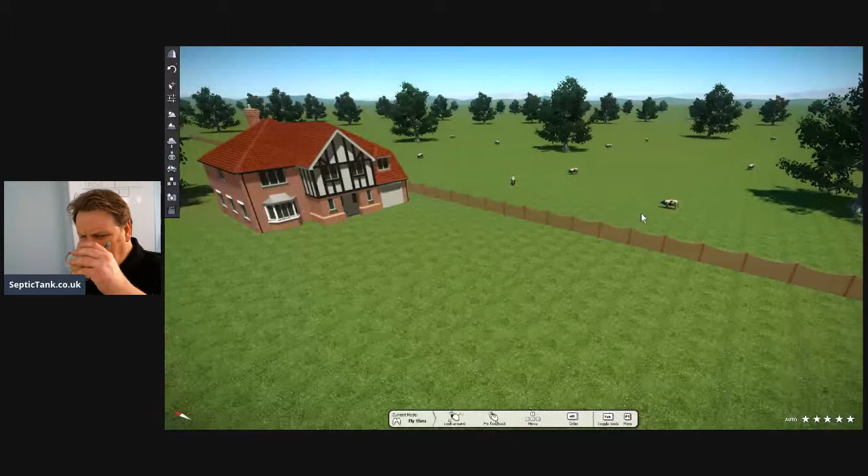So here's a typical house, I've got a lovely garden there, and you've got the cows and the trees, kind of an idyllic house in the countryside. So let's say this house here needs a new septic tank, and the septic tank's going in the front garden. So let's give you a quick précis of the sequence of events.

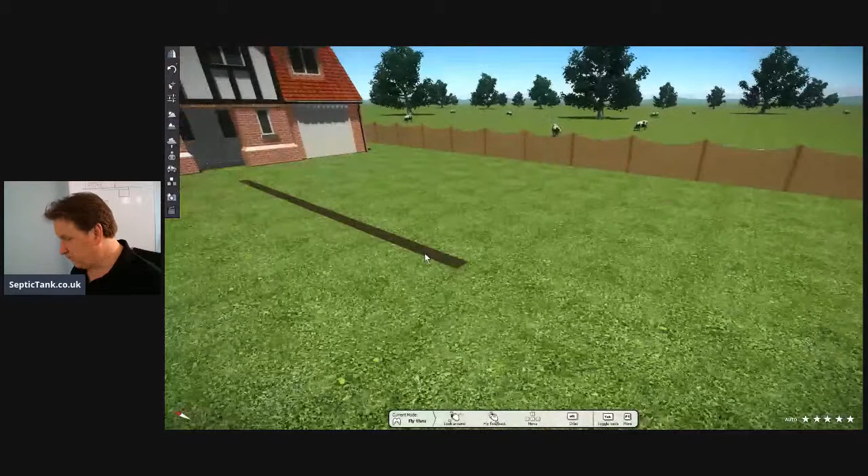Okay, so let's start. Let's hope all this technology works tonight. So the first thing you need to do is a trench. So there we go, there's a trench. Now, if you're wondering what the hell's he doing, the trench here is for the pipe.

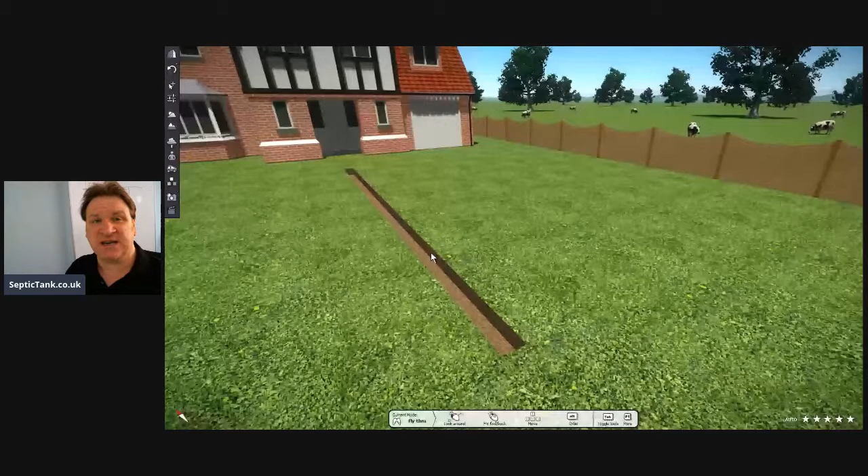Now, imagine in the house here, all the wastewater is in the house - whether it's your bath, your bidet, your shower, your sink, your kitchen, whatever, all the wastewater is in the property and it needs to go somewhere. If you live in the city, obviously it goes into the sewer, but if you're in the countryside and not connected to the main drainage, there is no sewer. So you need a septic tank and soakaway. The first thing you need is a trench to put a pipe in to divert all the water from your property into a hole, let me show you next.

So let's give you this. So there we go, straight away we've got a trench and we've got a hole. All right, there you go, so it's pretty simple so far, yeah. Okay, pretty simple so far.

Now this particular septic tank system I'm going to show you is very, very popular right now. I'm just going to finish my tea before it goes cold.

If you're wondering why there's a tea bag in my tea, it's because I like builder's tea, as they call it. So you've got your trench here, you've got your hole. What we do now in the trench, we put the pipe in. So there we go, now you're starting to get the picture. Let's have a closer look. All the wastewater from the house is going to come down this standard 4-inch orange pipe, and as you can see at the moment, it's going straight into a pit.

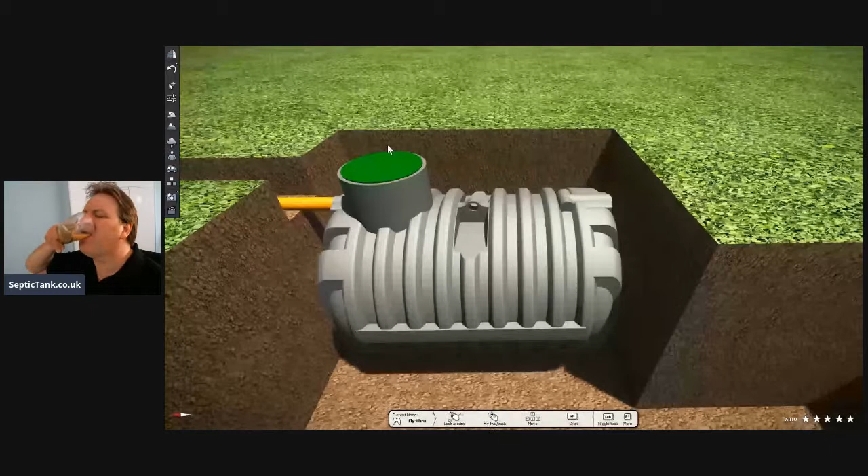All right, so that's the tank gone. So what do you do after you've connected your pipe to your septic tank? Well, let me show you this.

Okay, so we dig another hole. All right, so we dug another hole here. Can you see that? So this is the outlet pipe on the septic tank. So all the sewage, all the wastewater is going to go in via this tank. The tank is going to fill up with liquid and with water. All right, and here is the outlet pipe.

Okay, so let's put a pipe in the outlet pipe. There you go. Okay, so now it really is starting to make sense, isn't it? So you've got an orange pipe in, the tank fills with water, and you've got an orange pipe out. Now the orange pipe goes to a soakaway.

Now there's many different soakaways out there. Some of the best soakaways that I prefer for many reasons, not only because they're approved by building regs, but also because they're very easy to install. The beauty with a bullet-shaped septic tank is that the outlet pipe is very near the grass here. Can you see? So you can start the soakaway literally just a foot or so from the grass.

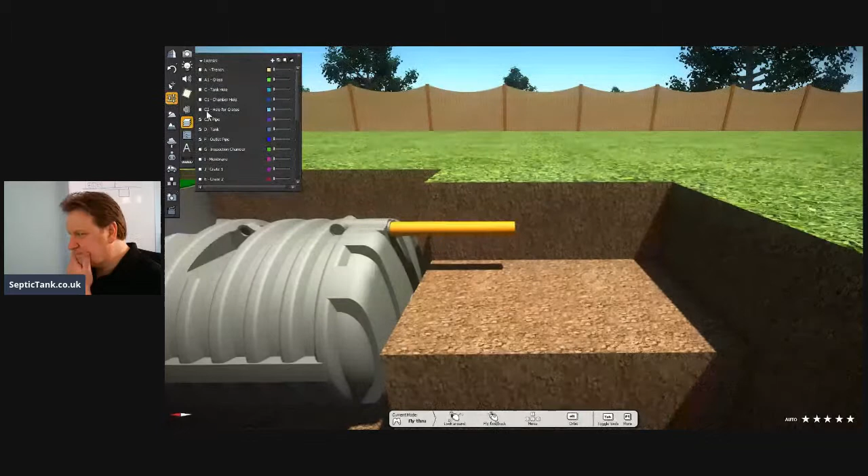Okay, now let me show you this. So what do we put on the end of the outlet pipe? All right, well let me show you this. You put an inspection chamber. Now, why do you put an inspection chamber on the outlet pipe?

Well, I'm going to create another hole now and show you. So let's dig another hole now for the soakaway. All right, hold on 2 seconds, let me dig. There we go. Gotcha. All right, so there we go.

So if I was to just give you a quick overview now, we've got the pipe coming from the house. It's coming from the house there, so there's the house there. All the wastewater travels down there into the septic tank, and then it's going into this inspection chamber, which I'll show you what that's about in a minute. But this is the hole for the soakaway.

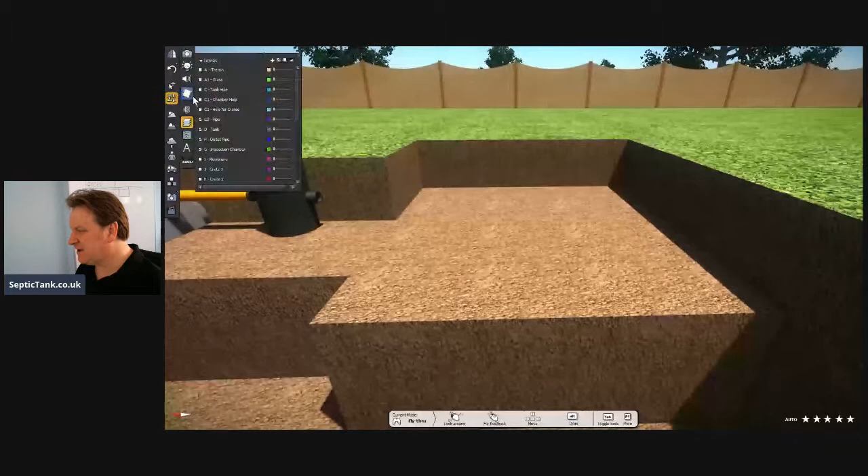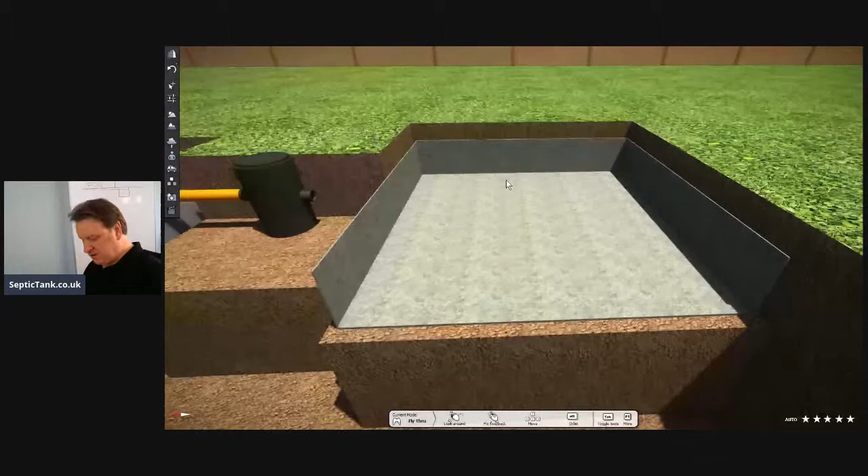And what's going in here is the amazing septic tank soakaway crates. The soakaway crates basically are a fantastic invention, whoever invented these. So what you do, you line the hole with membrane - I'll show you why in a second - and then in the membrane, you then just put the crates in. Put 1 in, 2 in, 3, 4, 5, 6. Now the number of crates can differ.

It depends on the size of how many bedrooms you've got. Okay, so it depends on the number of bedrooms. But if you go to septictank.co.uk, I've created the soakaway kits, the septic tank soakaway crate kits, matched to the number of bedrooms, so you don't have to worry about that. Okay, so there you go, so you've got your membrane.

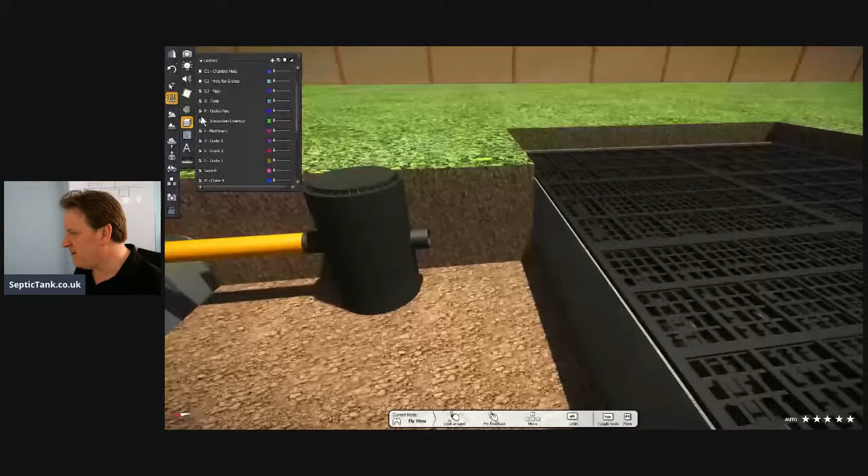I'll show you what the membrane does in a minute, but once you put your crates in, you connect the outlet pipe. So we've got a pipe from the tank into the chamber and into the crates. Can you see it there in the crates?

You can cut a hole with a knife or a hacksaw in the crates, and then literally you just put in the pipe. That's probably gone in about 1 or 2 feet into the crates. So that is what the septic tank and soakaway look like.

Now, septic tank soakaway crates are not rainwater crates. Let me state that. You cannot use rainwater crates for a septic tank soakaway. You're not allowed to. On many sites you'll see that rainwater crates are illegal, or not to be used for septic tanks, and they're not. These are special septic tank soakaway crates.

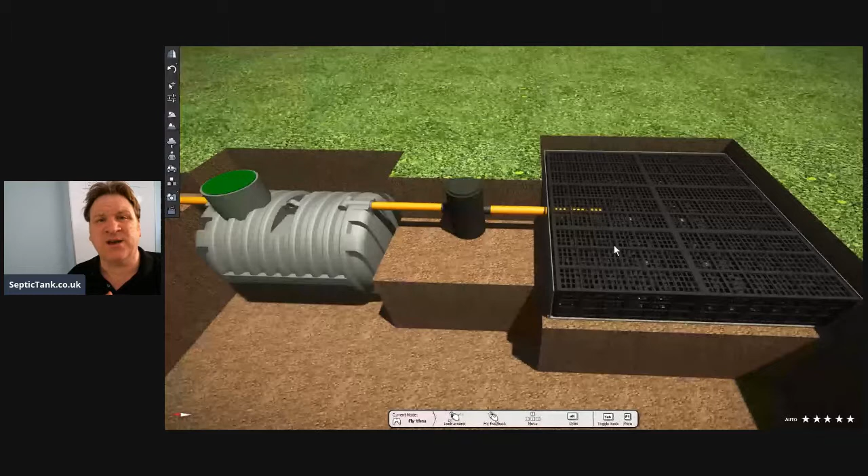Many builders do buy the rainwater crates and use them for septic tank soakaways, and what happens is the membrane and everything just sludges up and it balloons, and they have to dig it all out again and then go and put septic tank soakaway crates in.

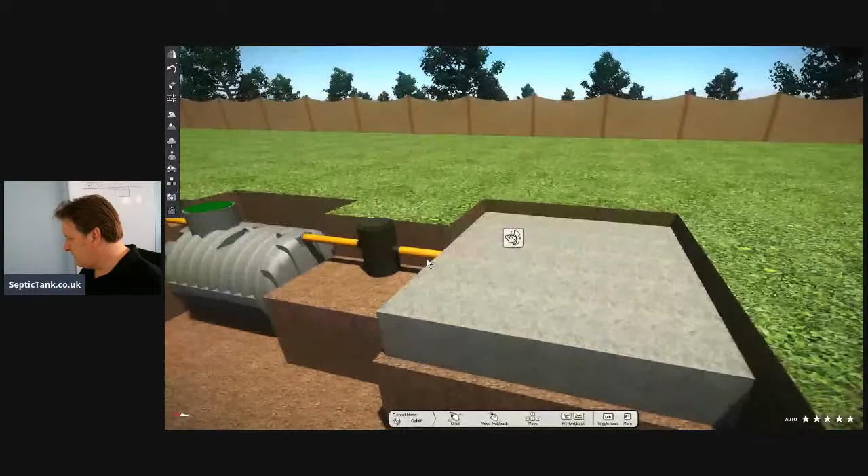So once you put your crates in, you basically just cover everything over with membrane, just like that. The reason you cover it with membrane is because it stops the soil getting into the crates. If you look, you've got it on the sides and on the top, so no soil can get in there.

Now, you don't have to put membrane at the bottom of the crates if you don't want to. You can if you want, but personally I don't—I like the water to go into the crates and then drain away here. All the liquid comes out of here into there, and it goes into there, and the membrane acts as a time release agent, so the water is time released into the soil.

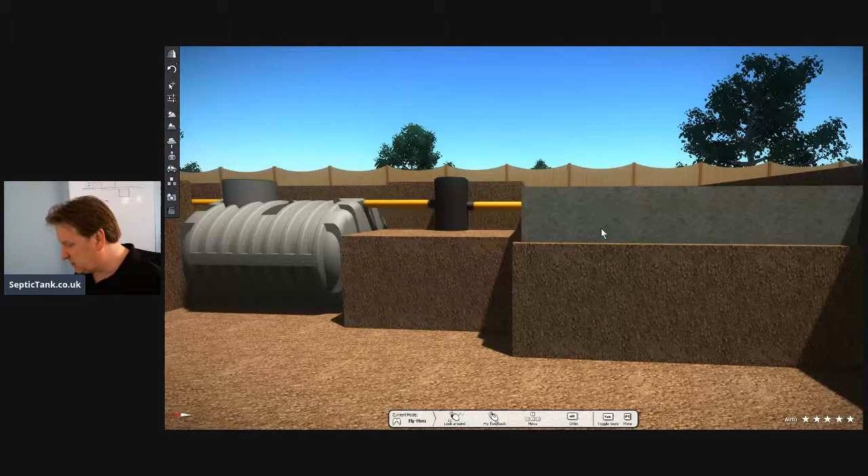So that is the septic tank soakaway system. That's one of the most popular systems on the market today.

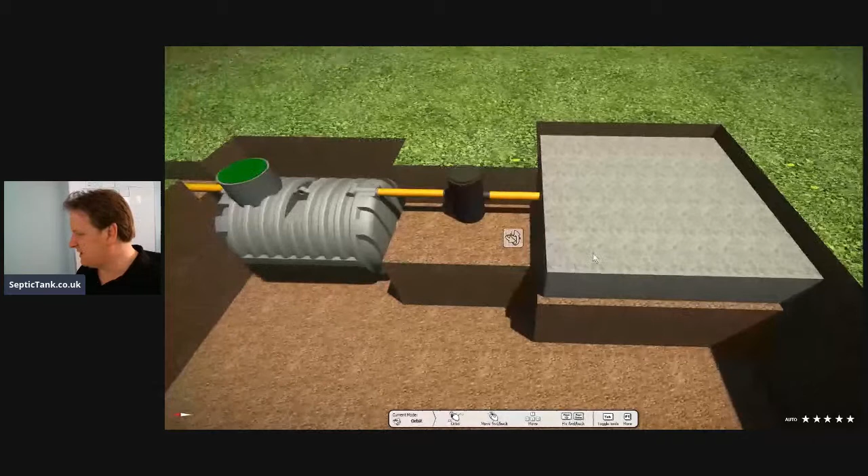So what is this? Why have I got this here? Well, 3 of the main products that cause problems with septic tank soakaways are sanitary towels, baby wipes and nappies. You'd be surprised—although you may be responsible, and I'm not saying people are irresponsible, people just don't think. They flush baby wipes down the loo or sanitary towels, thinking it's a natural way to dispose of something. Sometimes even nappies—they're just not thinking.

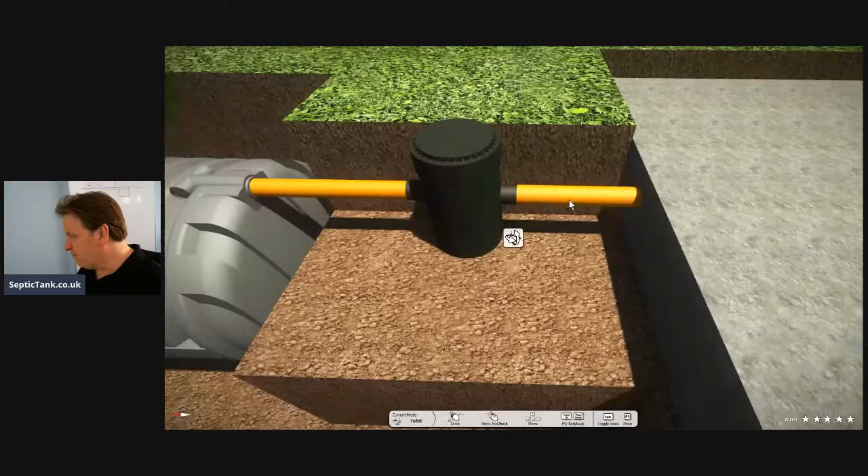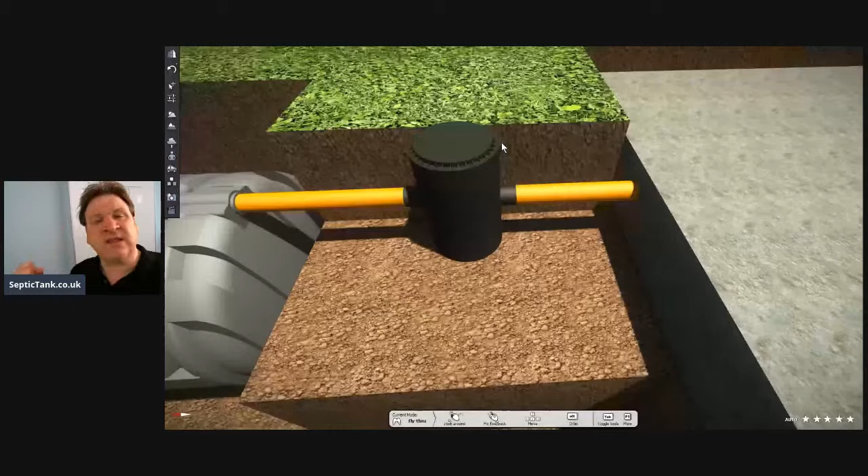But what happens is, if you've got this inspection chamber here, there's like a filter, a brush filter, that sits in between from here to here. I supply a free brush filter with it, and the brush filter basically traps any debris, and the debris is stored in here. So once every 6 months or once every year, you can just lift the lid, take the debris out, and basically it protects the soakaway.

Because imagine this: if your septic tank soakaway becomes blocked up, what are you going to do? The septic tank emptying firm will come and suck everything out of the tank, but they won't be able to suck out the blockage in the soakaway. So someone has to come, like Dyno-Rod, dig up your soakaway, unblock it and put it back. It's going to cost you £1,000 or more.

So for the sake of a manhole chamber and a filter—I supply a free brush filter with it—it will save you hundreds and hundreds and hundreds of pounds. So there you go, that's your septic tank soakaway.

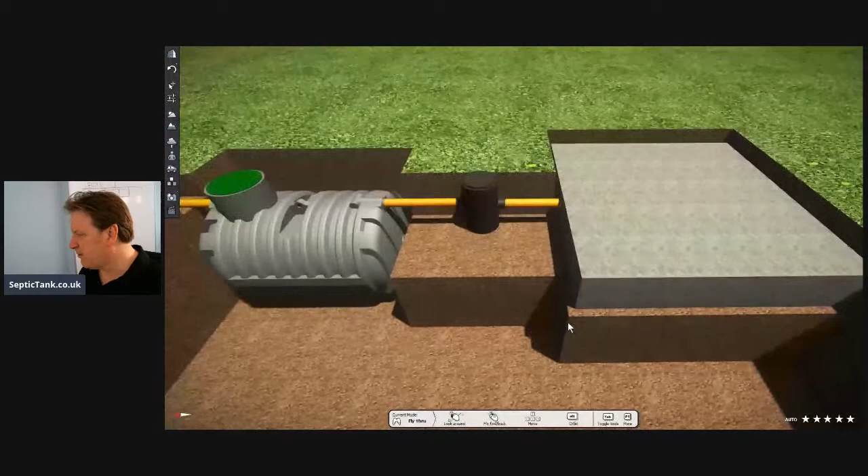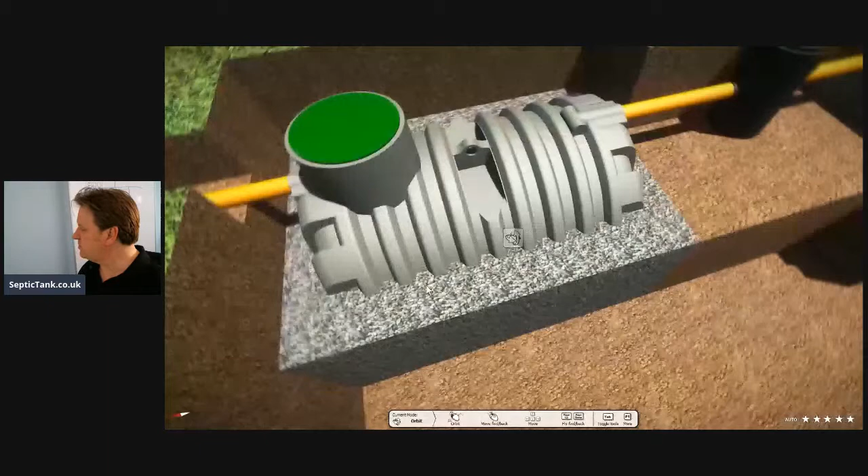So once you've got it in the ground like that, all you need to do now is put shingle around the tank. Remember me telling you they're low profile tanks? The beauty with these tanks is that they don't need concreting in. You can just literally backfill with some shingle, just like that. And the reason for that is if the ground's boggy, or you've got any water pressure, the shingle around the tank will absorb the water pressure and stop it popping out the ground.

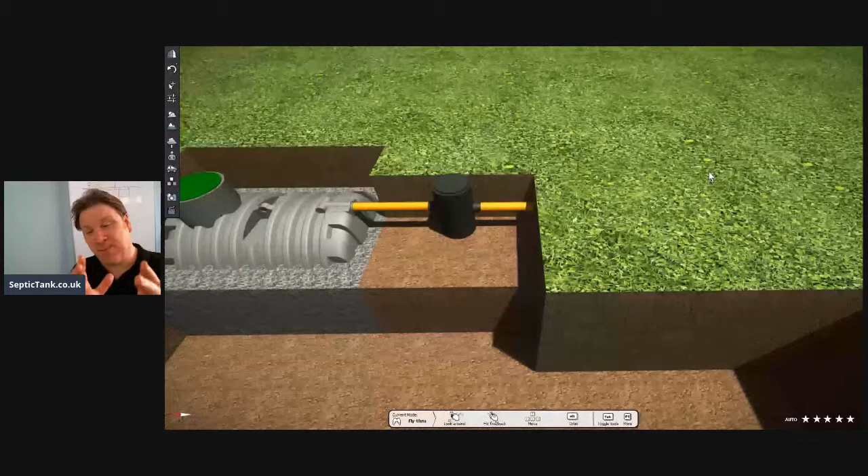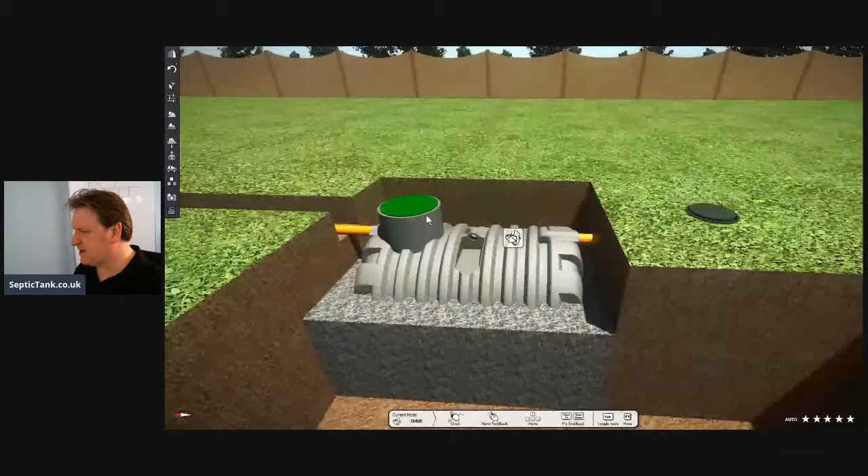Then all you need to do is this. Let me show you. There you go, so then you just cover the crates over, the septic tank crates, with soil. They've got a 60-ton bearing load, so if this is a drive, don't worry about it—the crates just go under the drive, no problem. You can drive a tank over them, it won't crush them. Then what I do is put soil around the inspection chamber. There's a pipe going in, so you've still got access with your lid there. And then all I do is just cover the tank over with soil. There we go, bang, job done. Look at that, how neat is that?

So then all you've got left is your trench, and you just literally put the soil over that. There you go. And then once you've seeded it, or turfed it—that's the word I was looking for, it's been a long day today—once you've turfed it, job done. There you go, and that is a brand new septic tank and soakaway system. And that will take you, if you've got a mini digger and you've never done it before, half a day to do maximum. They're just so easy now.

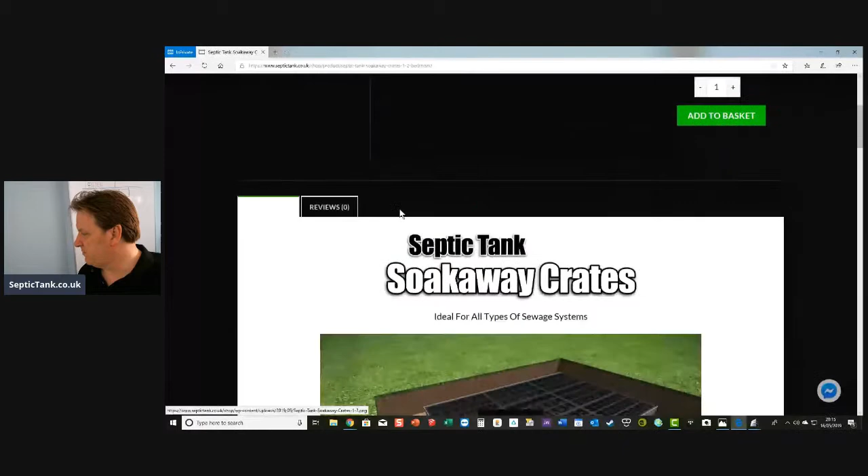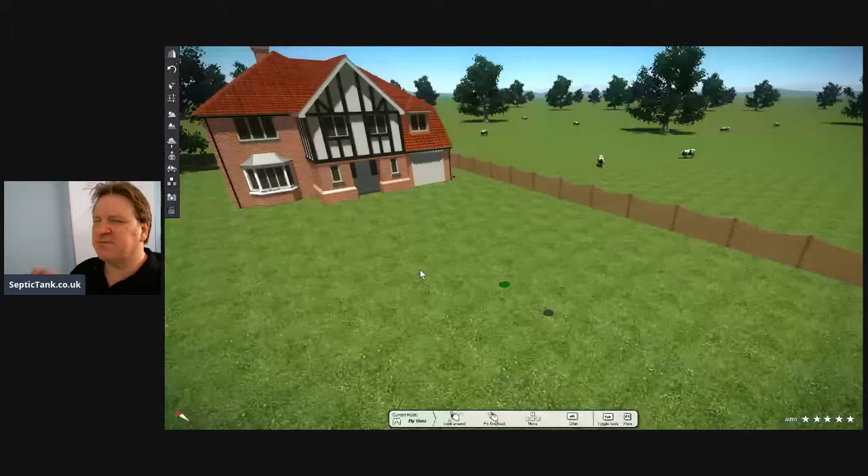Now I just want to show you one more. I want to show you something fantastic now, something amazing. The next one is called Easy Drain. So we've already seen about the crates. Oops, where did we go there? Okay, where did we go wrong? I'm still here, if you're wondering what I'm doing—everything's just gone a bit skewiff on me. All right, so I'm still here. Oh, there we go, we're getting back now.

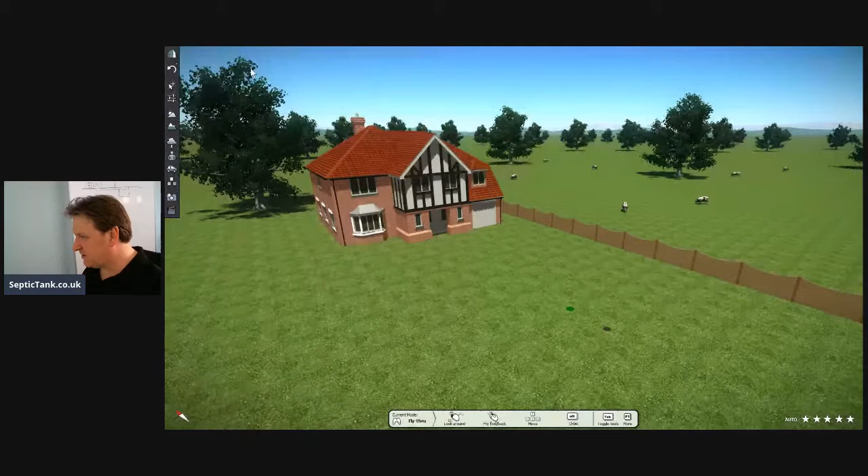All right, let me show you. So that's the soakaway crates. Okay, so now we take that down and now we go to Easy Drain. Let me show you this. So we've got the same kind of type of house, but maybe they don't want septic tank soakaway crates. You don't have to have septic tank soakaway crates—it's a serving suggestion, all right? Now all of these products are legal, but some people have different preferences, so let me give you another serving suggestion.

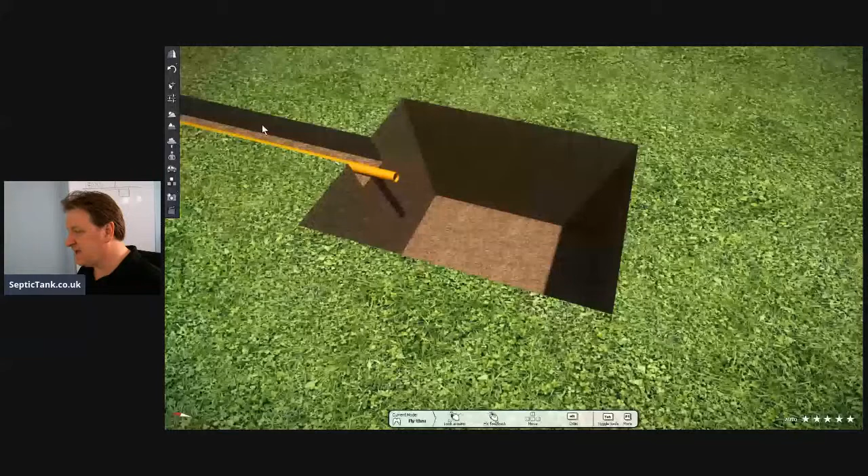Okay, so you dig your trench, you dig your hole. All right, so here we go, let's show you where we're at. So we've gone back to here, we've dug a trench and we've dug a hole. And so in the trench, I'm going to put the pipe. Ta-da, so there we go, remember that? So we got the pipe. All the wastewater comes down from the house into the hole, and here is the hole. There's the hole there. And so now in the hole, we put our tank. You've seen me do that before, haven't you? So that's nice and simple, isn't it? So we've got all the wastewater coming from the house down into the tank.

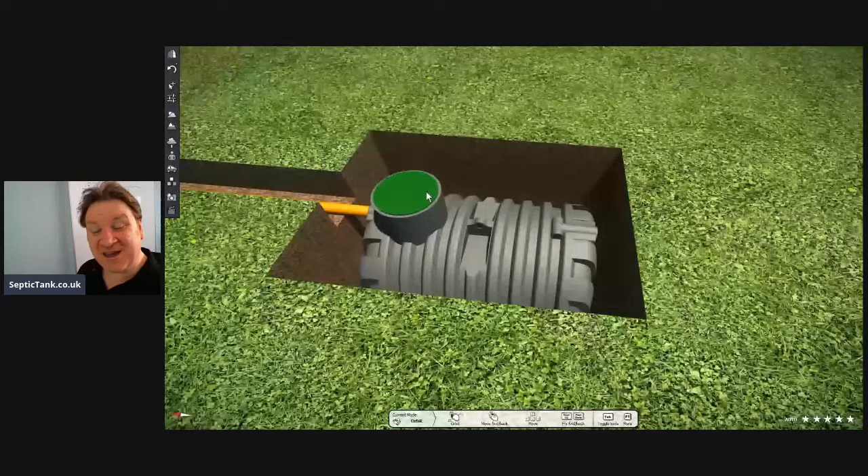Now, this is where the septic tanks differ. Have a look at this. All right. So then what's this? On this one, it's almost like a chicken's foot, isn't it? It's 3 fingers. I call this 3 fingers. So this is where the product called Easy Drain is going.

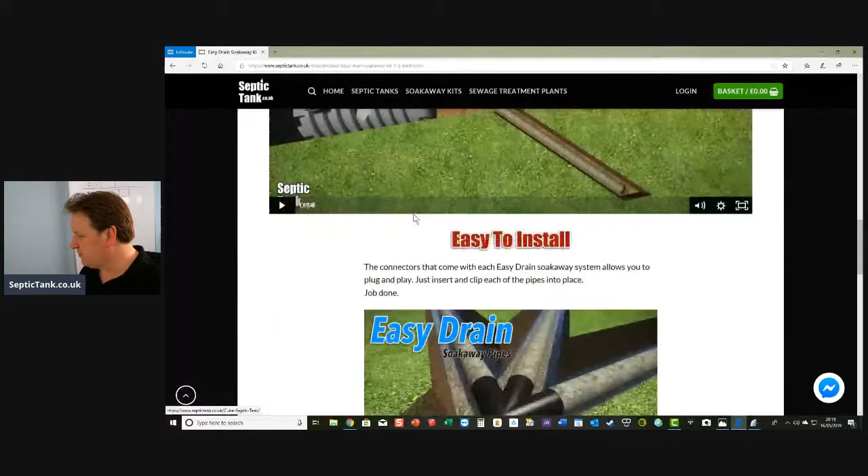So let me just show you this, right? So the Easy Drain here, they're basically pipes, and they've got a space age kind of membrane over them. I'm going to show you what they're like in a minute. They just clip together, and again, you can just add them to the basket. But I thought I'd just show you what they look like there. So let's just go back to here.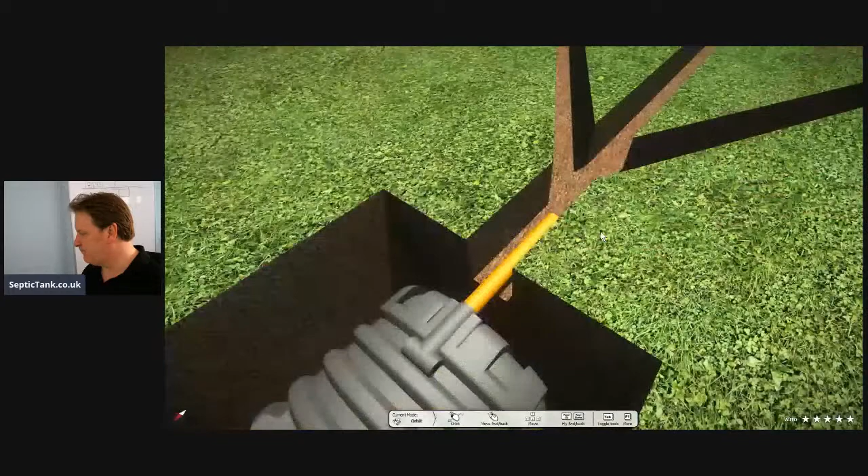Easy Drain. Okay, so let me show you how to install this Easy Drain. You've got your outlet pipe there. So then we put our outlet pipe in. There we go. So remember that. Let's just give you an overall view. You've got your pipe in there, you've got your tank there, and then you've got your outlet pipe. And now what we do is, then we put our inspection chamber there.

And just once again, remember me telling you how shallow the soakaway is there. Look at that, man. Let me just get a cutaway section here. Let's see if I can get into the hole a bit more, although you can see it from there. There we go. So can you see how shallow that soakaway pipe is? On the onion-shaped septic tanks, the soakaway is going to start all the way down here. It's crazy on the onion tanks.

Look, I'm not demonizing onion tanks, but people think if they buy an onion tank, because they're like 150 quid cheaper up front, they're going to save money. It's a misnomer. It's a red herring. The onions are about 150 quid, 200 quid cheaper than a bullet-shaped septic tank on the front end. But you've got to dig a hole that's 3 times deeper than this, and you've got to concrete the onion tanks in. They cost another 1,200-1,300 quid to put in by the time you've factored in the concrete.

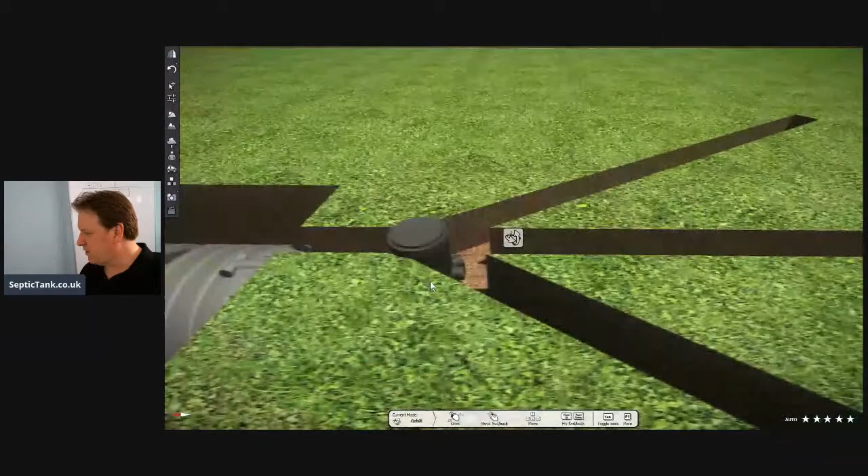If you don't concrete the onion tanks in, the manufacturers won't warranty them. And you've got to get a bigger digger, which is going to cost you 200-300 quid more. Plus, it'll take you a day or 2 days to put the onion in the hole. To dig down 11, 12, 13 feet is no fun. Believe you me, I've done enough onion tanks to know that. But some of these low profile tanks are just 3.5 foot deep. So you've put that in, and then here's your inspection chamber.

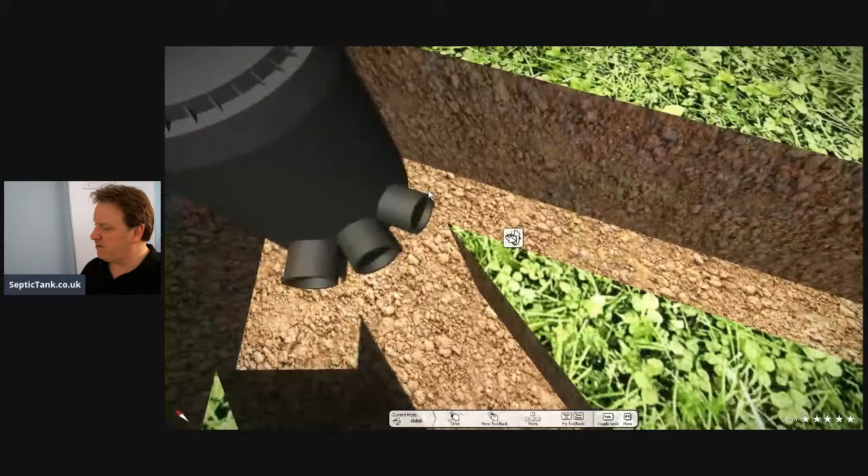Now again, I put a special filter brush in that with a sock on, and that goes into there. You'll notice on the inspection chamber here, you've got 3 outlet pipes, and that's good because each of the fingers from the Easy Drain slot into there. They just push in. They're a loose fit, not a tight fit, and they go in about half a foot. So let me put the Easy Drain on for you. Let's put the 3 fingers on.

So literally like 3 fingers on your hand, there's 3 fingers on the Easy Drain. And that's what they look like. They just literally slot straight into there. And they've got male and female connectors on, so they just slot together. Giving you a bird's eye view again, let me put the grass back on. So just extending up, they literally just go in. It'll take you 5 minutes to put those 3 fingers on.

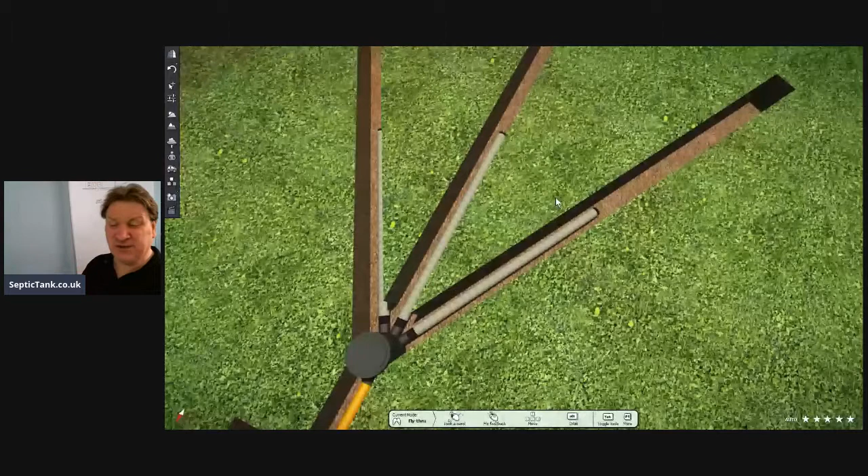Now each of those lengths is about 3 meters, so they're about 9 foot long each. So there's almost 30 foot of soakaway pipe, but it's spread over 3 fingers. So then from there, you just put the next set of fingers on.

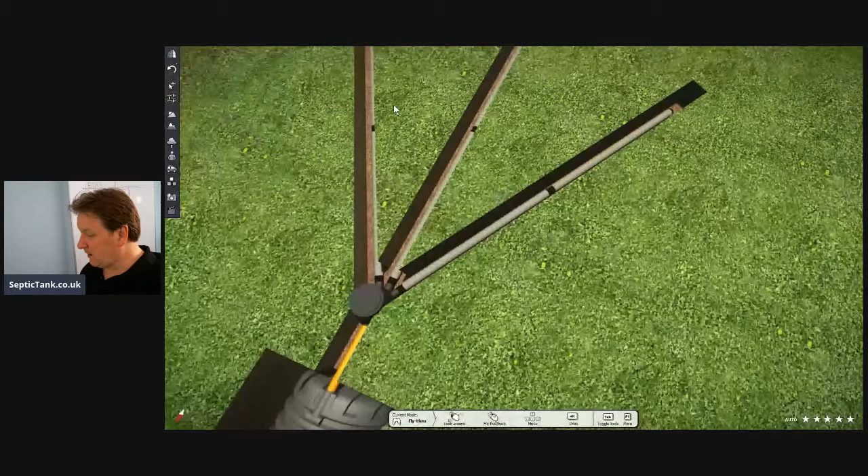Now, on some inspection chambers, you can have 5 outlets instead of 3, which means you can have 5 fingers, so instead of having to go really, really long, you can go wide and not so long, okay? So there you go. So that is what the Easy Drain looks like. Look at that. How amazing is that?

So let's just give you a bird's eye view of what the soakaway looks like from there. Okay, so that's what it looks like. So it's neat, it's tidy, and the whole thing will take you a couple of hours to put in, if that. And it's just absolutely amazing. And as I said, the beauty with the Easy Drain is that you don't have to use gravel with it. There's no law saying you've got to use gravel with soakaway pipes.

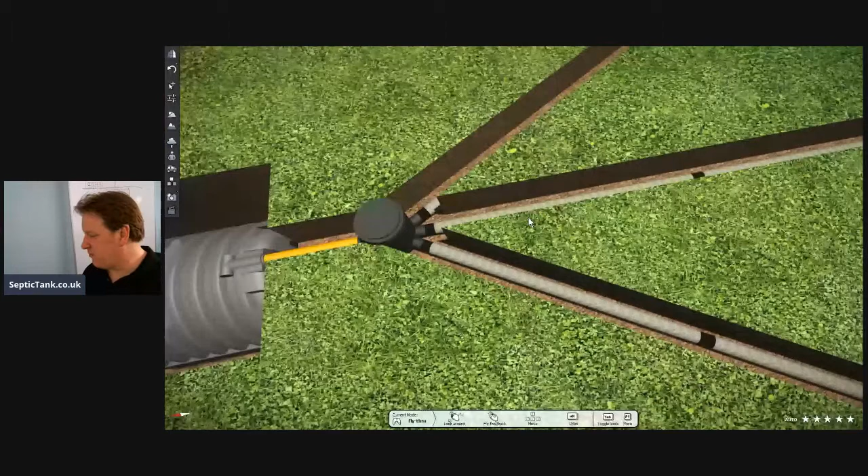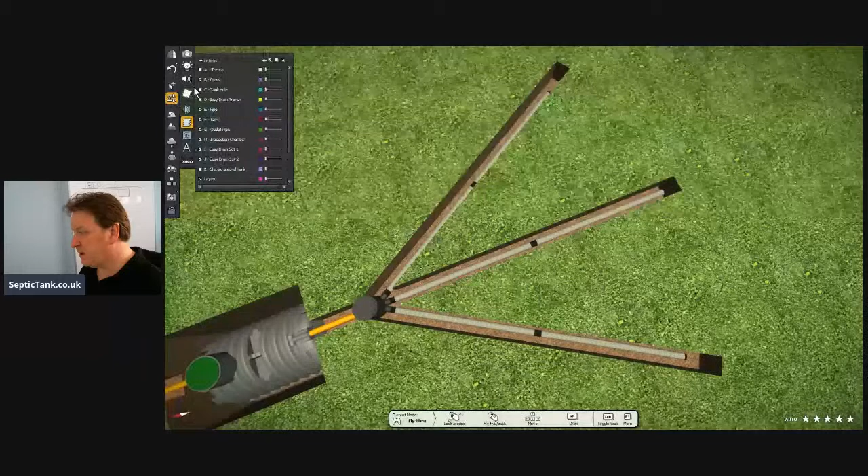In the membrane, right? So each of these pipes there, 3-meter pipes, you've got perforated pipe, and as I said, there's a special space age membrane around it, which is slow release into the soil. And because it's in the topsoil, 99.9% of the times you don't even need to do percolation tests, because it's just the best soil to install a soakaway in. So once you've put that in, literally all you do then is cover it over with soil. It's as simple as that, right?

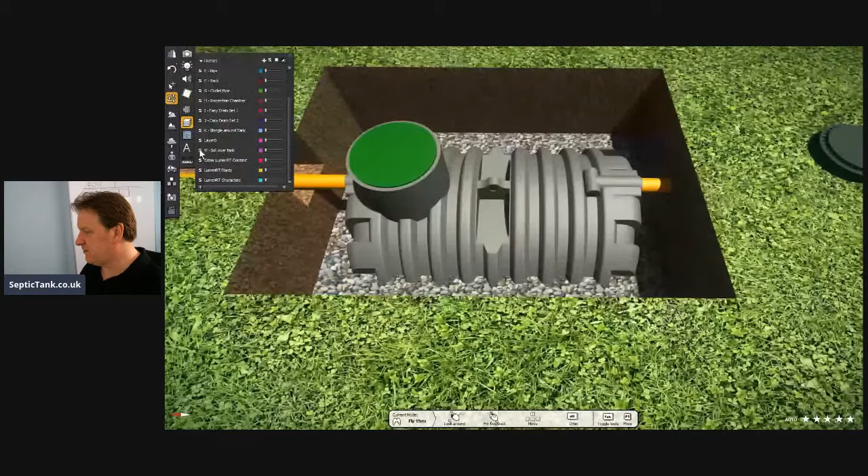And so once you've done that, and then there's the tank there, just backfill around the tank with shingle. There we go. There's shingle around the tank there. Look at that. I love these bullet-shaped septic tanks. They are the best, man. It's just absolutely amazing, okay? And then once you've done that, just put the soil over the tank. Oh, let's try that again. Yeah, all right. There we go.

And then all you've got left now is your trench, which goes to the house. Remember, that's the pipe from the house that's been exposed there. And then we just put the trench in, and there, look at that. That is absolutely amazing. All right. I love septic tanks. I love bullet-shaped tanks.

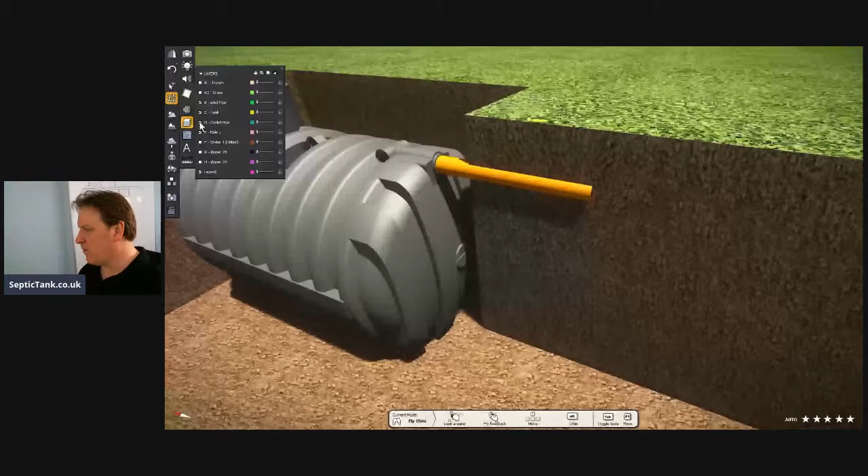So you've got your outlet pipe there. So let's put the outlet pipe on it. Okay, so here's the outlet pipe. There you go. All right, so let me show you how to do a percolation test.

All right, all this stuff for free, man. It's amazing. Okay, so let's do this.

So you've put your bullet tank in. So this principle I'm about to show you works for any septic tank. Okay, it works for any septic tank, so don't worry about it.

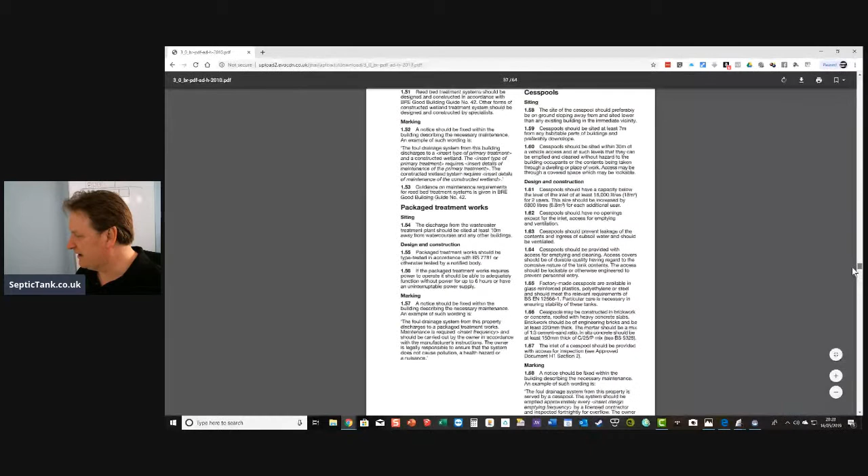And if you're wondering, basically I'm getting the information that I'm going to share with you now from UK Building Regs. Fantastic bit of information and guidelines on how to install septic tanks and soakaways, stuff like that. But we're looking at this bit. Okay, so this is the bit I'm going to be covering with you. The percolation test method. Look at that.

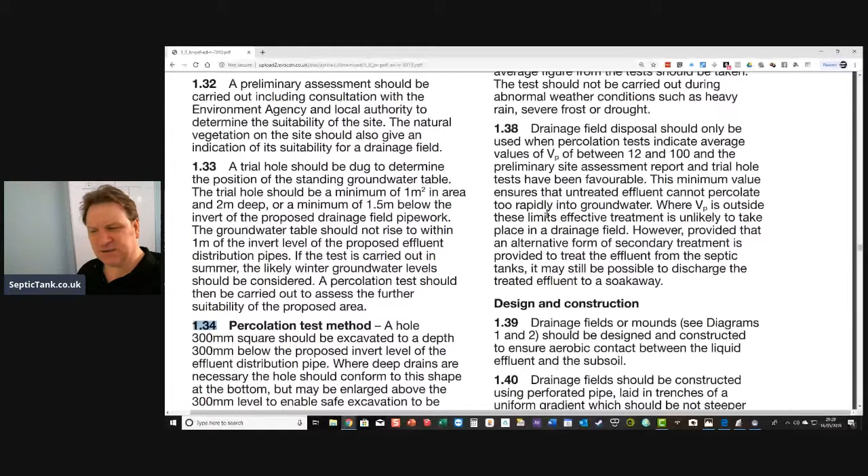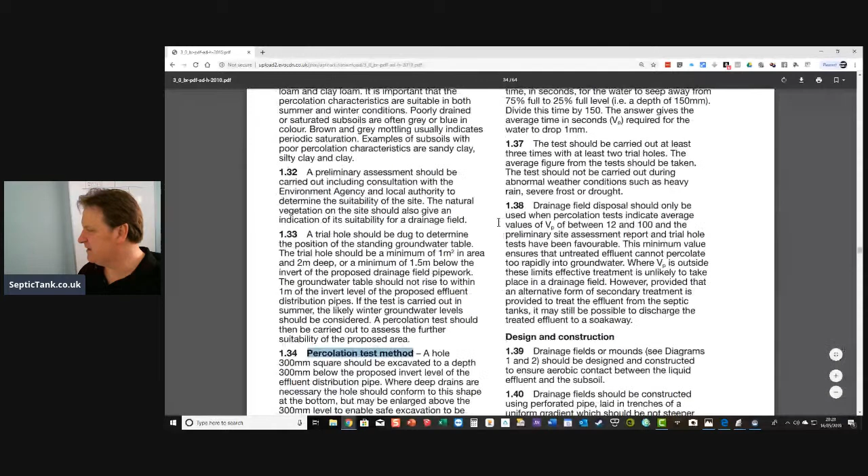All right. So we're starting on 1.34 there, right? And it goes all the way 1.35, 1.36, 1.37, 1.38. So let me interpret this information now on the percolation test method. So hopefully by the time you've done this, you'll be a bit more conversant with how to check if your ground's suitable for a soakaway. Okay, so there's the outlet pipe right there.

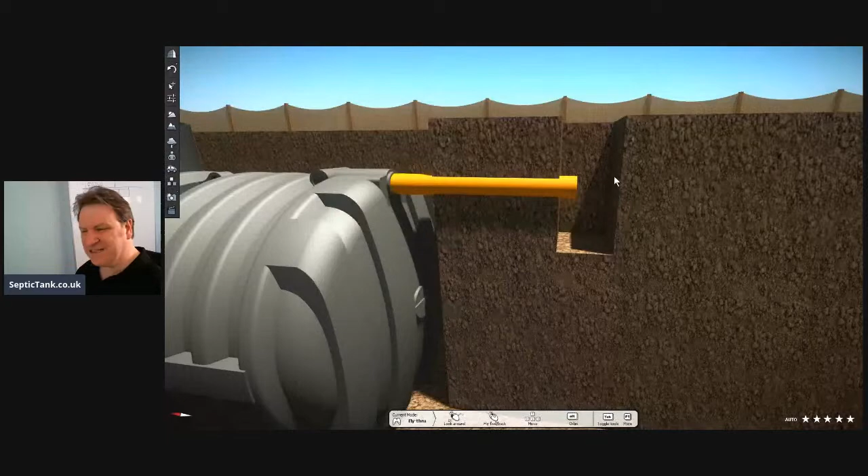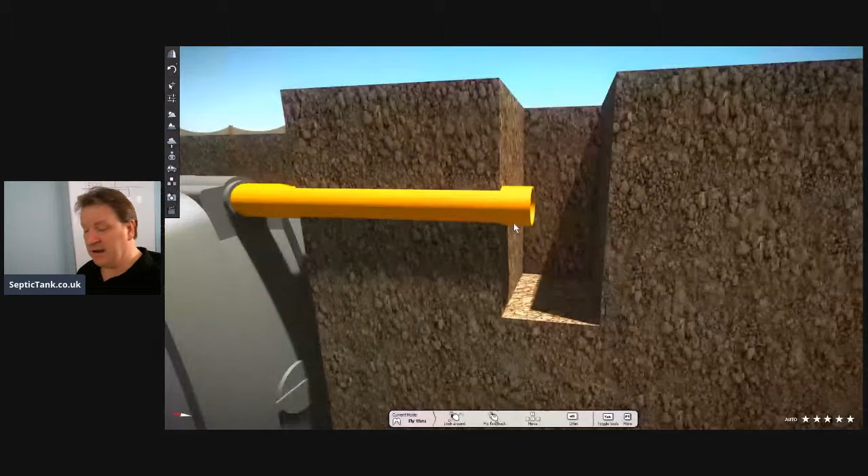Now, the first thing you've got to do is to dig a hole. So let me dig the hole. There we go. So dig yourself a hole. Now, the hole that you need to dig is 300 mil by 300 mil by 300 mil, 300 mil squared, okay? And then you go 300 mil below the level of the outlet pipe, okay? 300 mil below here.

Now, once you've dug that hole, you then fill it with 300 mil of water. There you go. That's pretty straightforward, isn't it? You fill the hole with 300 mil of water. Still pretty straightforward. Then you just leave it. Leave it overnight. And when you come back in the morning, the water will have drained completely away. That's fine.

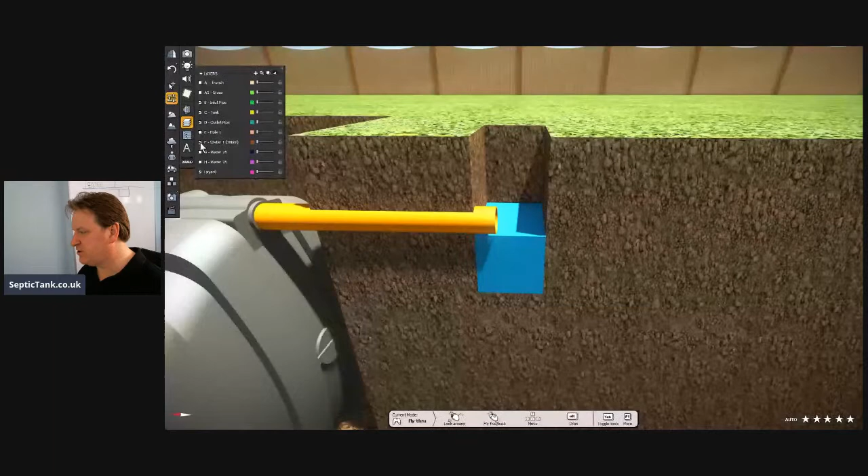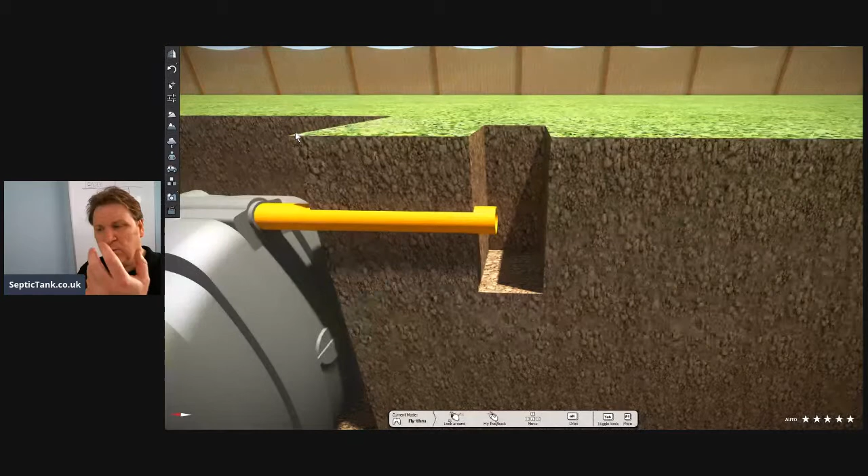Then you need to fill the hole back up with 300 mil of water again. So before you fill it up again, let me just tell you what you need in preparation. You put the water in the hole, the night's gone by, you've come back, there's no more water in the hole. Get a stopwatch on your phone or on your watch, whatever, and get ready. So you've got your bucket, 300 mil of water, your stopwatch ready.

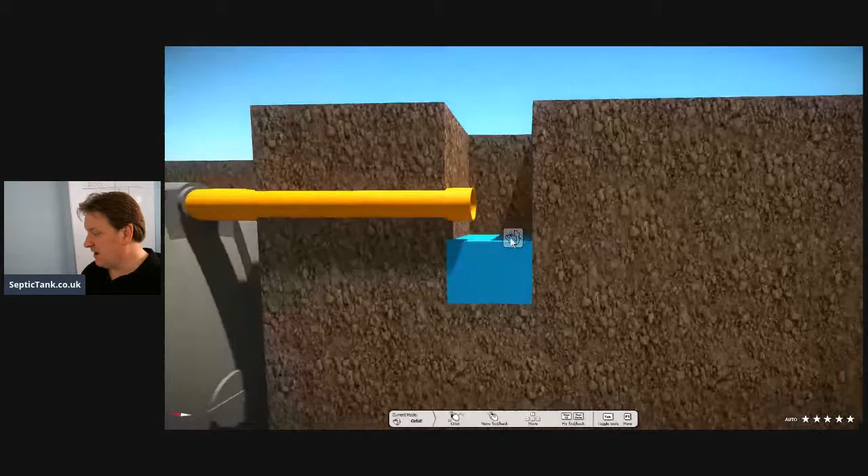So what you do, put your 300 mil of water into the hole. Then as soon as that water has fallen 25%, and 75% of the water is left in there, start timing. Press your phone, your watch, whatever, start timing. And the bit that you time is how long it takes to drop from,

So you start timing as soon as it's dropped to 75% of its original height. And then you time how long it takes to drop to 75 mil. It's as simple as that.

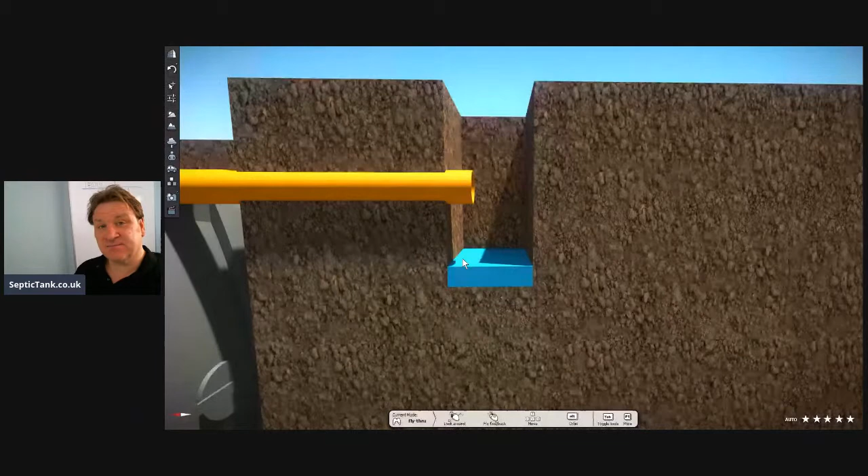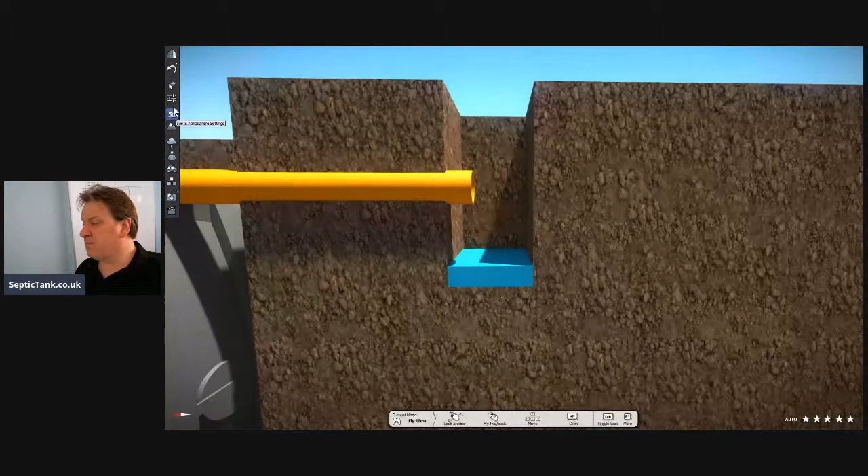So 150 mil. I'm messing this up a bit because I'm tired, but look, you've got 300 mil of water. There's 300 mil. So imagine it's split up into quarters. Each of those quarters is 75 mil. So once it's dropped 75 mil, you start timing. Then you time it until it drops 150 mil more. All right.

So there's only 75 mil left in the bottom, and then you record the time that it took to drop 150 mil. Does that make sense now? Sorry if that was a bit nonsensical before, but it's late and I'm tired. Okay, so that's it, I'll tell you about that again in a minute. Right, and then once you've done that, just record the time.

Building reg says you've got to do that 3 times. Don't do it if it's raining outside, or if the ground's really waterlogged. But if it's rained hard during the night, or it's raining during the day, don't do the test. You have to do it once the ground's been dry, in normal dry conditions, for a day or two. And then what you need to do is dig another hole.

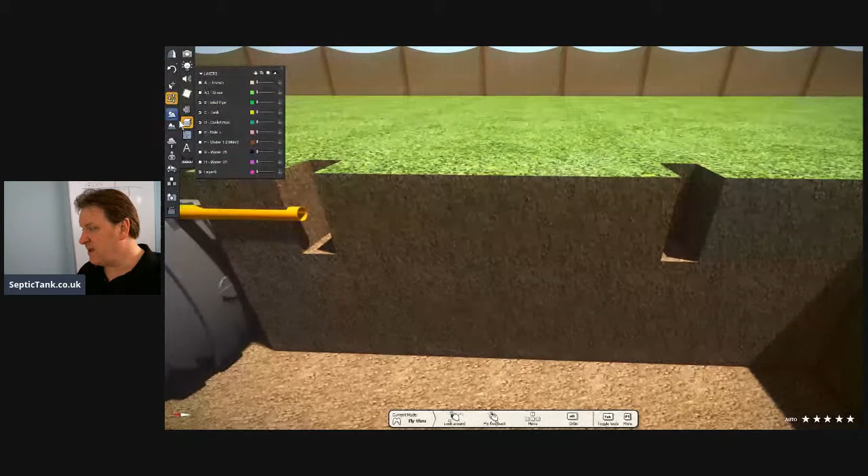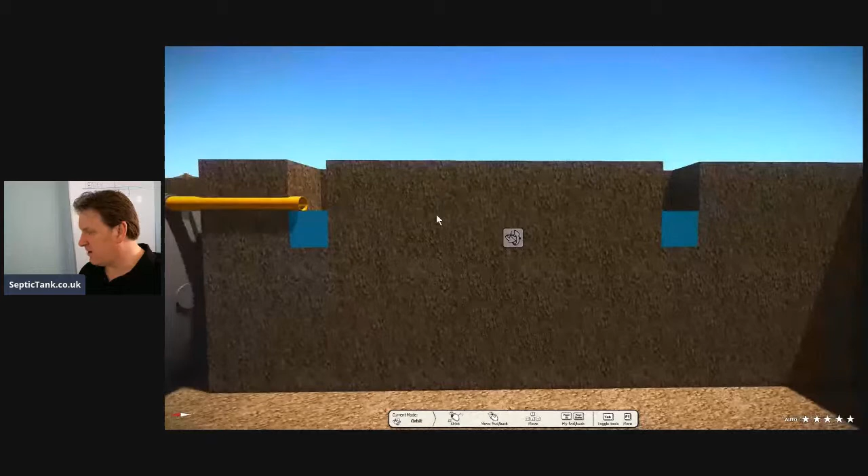So you've got to do 2 test holes along the path of where the soakaway is going to be. So I'll run through it again, hopefully it'll make a bit more sense this time. Do 2 holes, you've already put the water in the night before, then you just fill both of those holes with 300 ml of water. That's pretty straightforward up to now, isn't it? You fill both holes with 300 ml of water.

Then you don't start timing yet. You let the water level drop 25%, or 75 ml, then you start timing. You time the time it takes to drop 150 ml. There you go, so there's only 75 ml left in the bottom, and then you record that time.

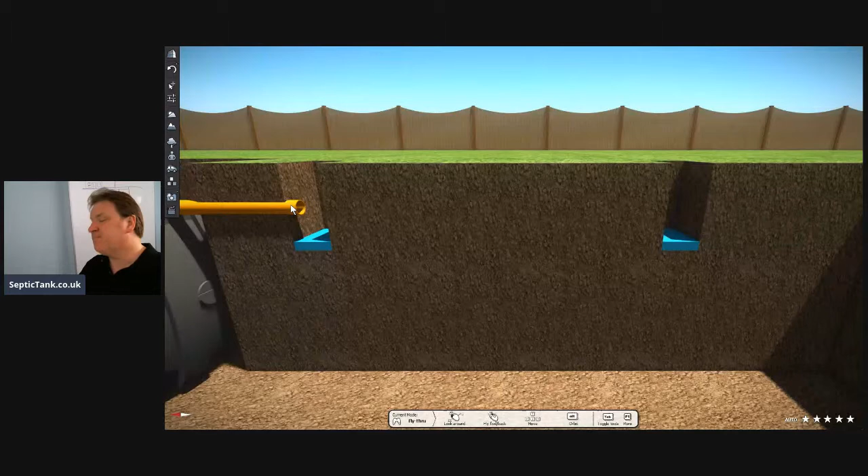So let's say you've done it 3 times on each hole, and each hole may have a slightly different calculation - it may be X amount of seconds on that hole, which may differ from the other hole. Don't worry about it, take a mean average. Then once you've got that figure, the figure of how long it took to drop, all you need to do then is...

Let me just get this up now if I can find it. Where have you gone? Oh man, I just had it a minute ago, didn't I? Where's it gone? This is the thing when you're live - got so many screens and stuff open here. I was just looking for building regs. Where's building regs just gone? Oh man, just bear with me a second here.

All right, look, let me show you this little trick while we're going live. If you want to find out where section H of the building regs is, watch this. You just type in 'section H of the building regs' on the internet, and I type in PDF. Here's a little trick, right? And there you'll find part H, and there you go - that takes you straight to it. So there's a little trick for you, okay?

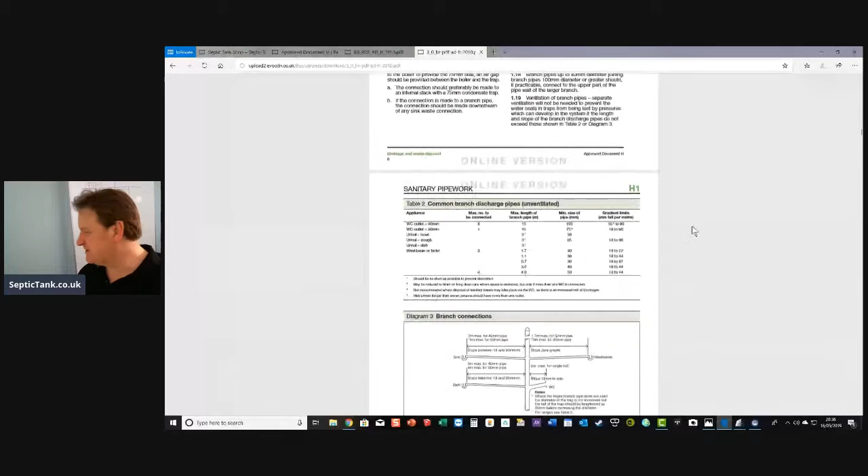And in fact, that is the wrong view, I don't like it like that. Let's see if we can get one where it goes down. Okay, oh man, here we go. No, I don't like it that way. Just bear with me 2 seconds - at least you know this is live, don't you? So let's try that once more. Oh boy, it's all going Pete Tong. Section H, building regs, it's all going Pete Tong, man. All right, here we go, let's try once more. Approved Document H, yes all right, it's going down, so here we go. Just don't worry if this is making you dizzy for the minute, but I'm going to show you now, I will get there, I promise you. Right, I'm going to show you what to do.

All right, now you've got your figures. So here we go, all right, this is all I wanted to show you. How can something so simple be so hard?

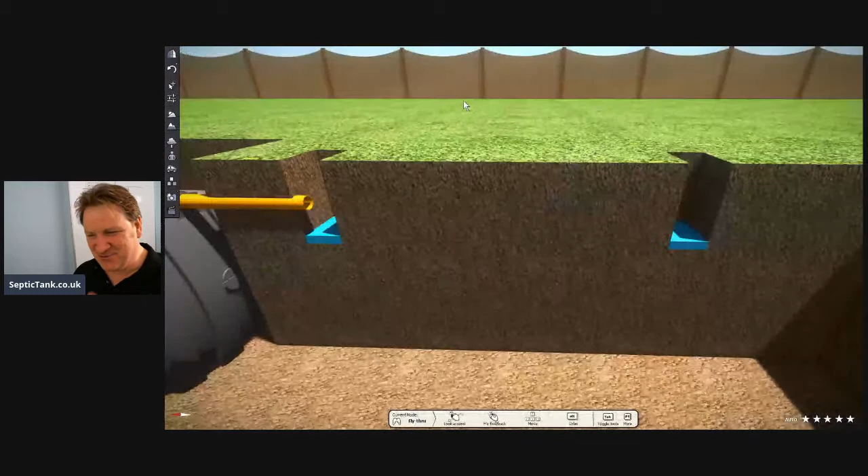Right, okay, so let's just recap, because you're probably thinking, who the hell is this madman on the broadcast, what's he doing? Well, I'm just going to tell you again. So if you've just joined me, I'm showing you how to work out the percolation - do a percolation test so you can work out if your ground's suitable for a soakaway or not. Okay.

So what you do, you dig 2 trial holes. Each of the trial holes should be 300 mm below the outlet pipe. So you get some water, and 300 mm of water to be precise, and you fill the hole up with water. Boom, simple as that.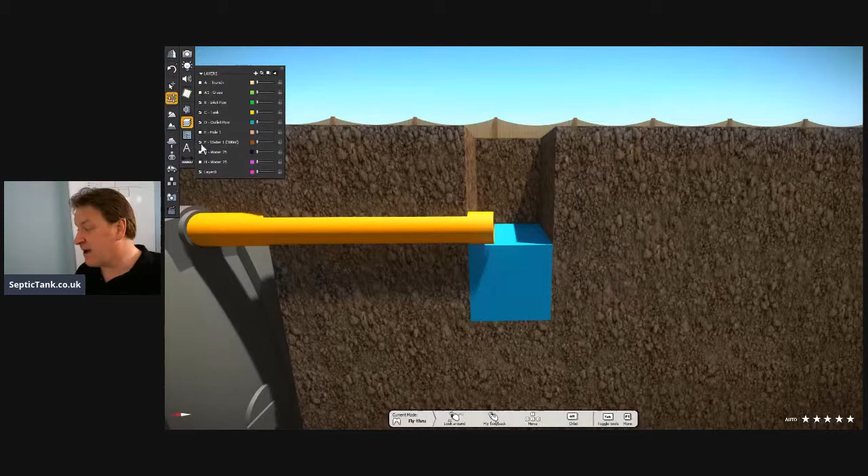Then go to bed, go and have a cup of tea, go to the pub, whatever, come back the next day. When you come back, you'll find that the hole, or both holes - there's hole 1, there's hole 2 - will be empty. Then you put another 300 mm of liquid into the hole.

Then get your stopwatch ready. You start timing once the water level has dropped 75 mm. Start timing it and wait, then you wait until it's fallen another 150 millimeters. Record the time. Okay, that's where we're at.

Do it 3 times and get a mean average - 3 times for the 1 hole, 3 times for the second hole, okay, and get a figure.

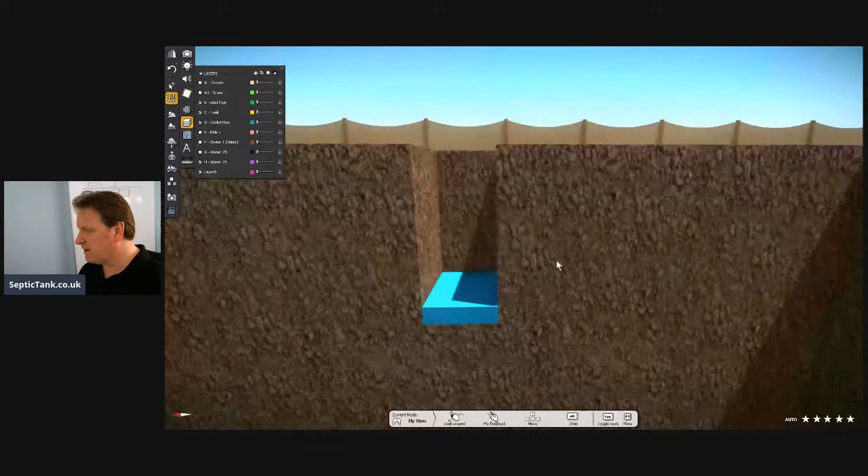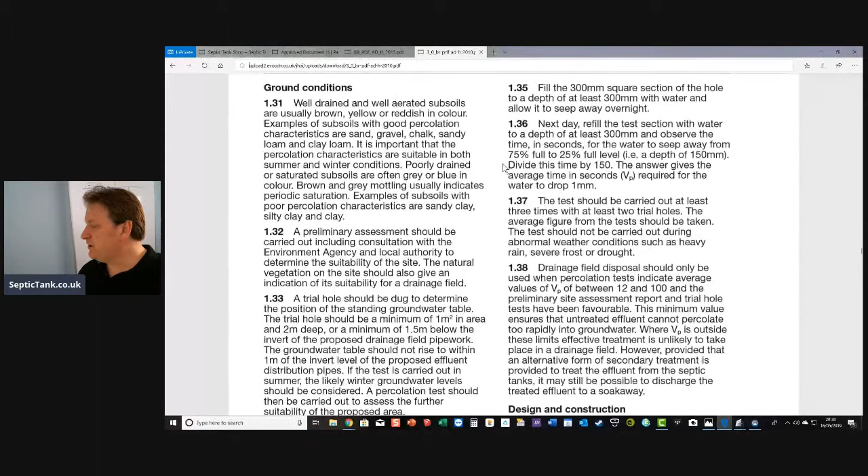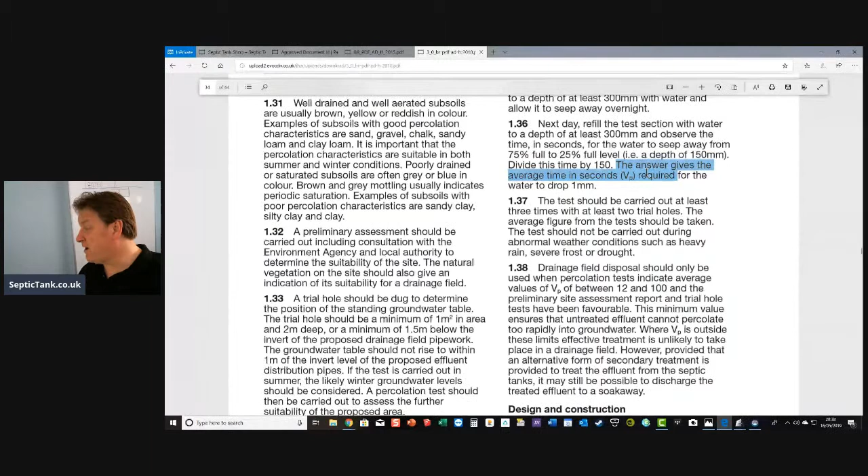Once you've done that, we can get back to here. Once you've got that figure - the amount of seconds - what you do is divide the time that you've recorded by 150, and the answer will give you the average VP time in seconds required for how long it takes for that water to drop 1 millimeter.

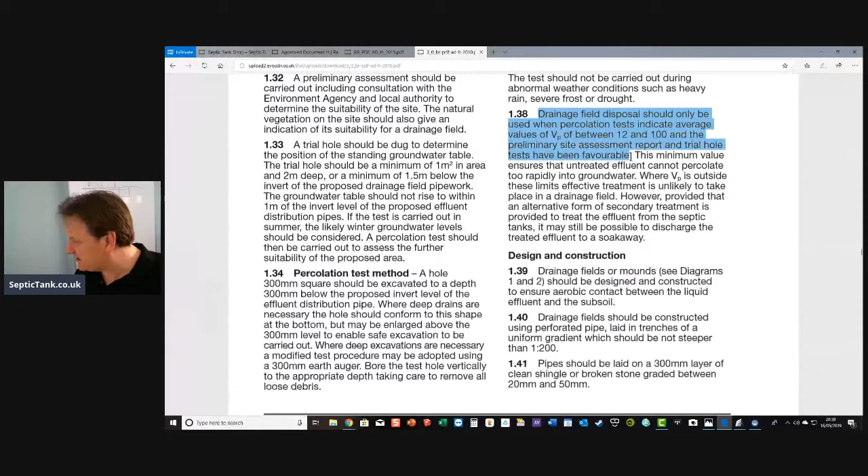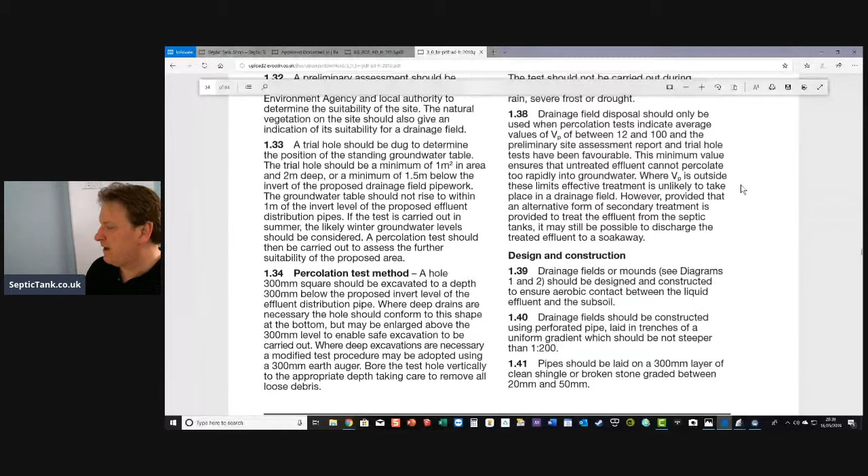So if I read this to you now, it says this drainage field disposal should only be used when percolation tests indicate average values of VP between 12 and 100, and the preliminary site assessment report and trial hole tests have been favorable. The minimum value ensures that untreated effluent cannot percolate too rapidly into the groundwater.

So there you go - that's how you do a percolation test to decide what soakaway is best for you.

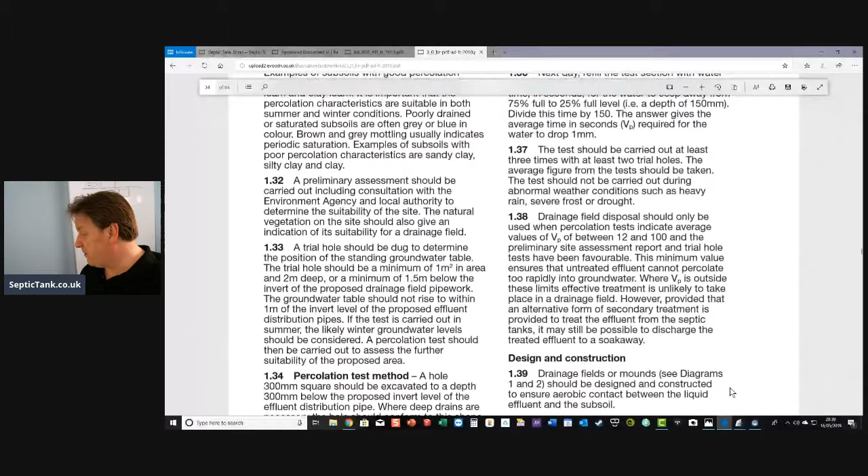So there you go. Just in review, we've seen 2 different types of septic tanks and soakaways. I've shown you, if you remember, how to install - so let me show you this.

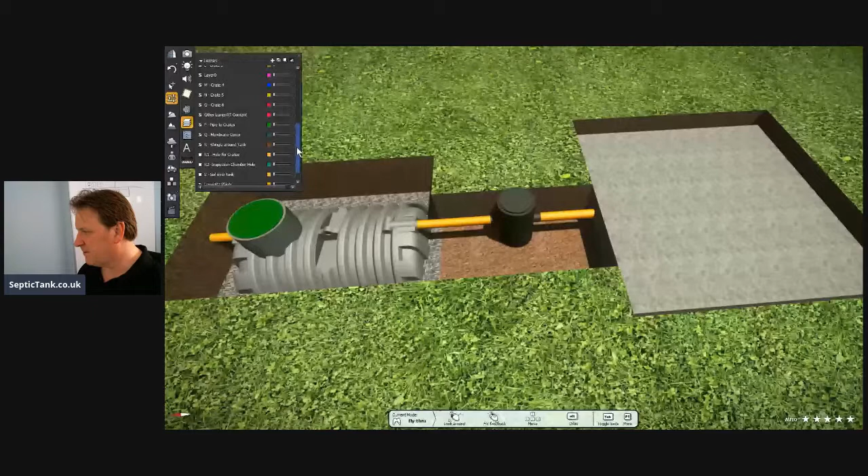So there's your bullet-shaped septic tank. If I take the main bit of grass off here - there we go. So that's what a typical septic tank and soakaway look like.

There's a bullet-shaped septic tank, which is really shallow and nice to install - takes you about an hour. Then in the middle, remember I showed you, you've got your inspection chamber that traps all the silt, all the debris, all the sanitary towels, the baby wipes, the nappies. Yeah, people do flush nappies down the loo.

And then that then goes into this amazing - okay, so here we go. Let me just put this in. Let me get the membrane cover off here. Ta-da! And then that - one of the best soakaways in our day - is these amazing septic tank soakaway crates. So that's what it looks like.

And with the grass on, as I said, this particular soakaway - if it takes you 3 to 4 hours to put that in, you know, it'll take you about half a day. So if you start about 9, I kid you not, you'll be finished by 1 or 2. That's how easy these particular soakaways are. And soakaway crates, as I said, they've got a bearing load of 60 tons, so you can literally drive a tank over them.

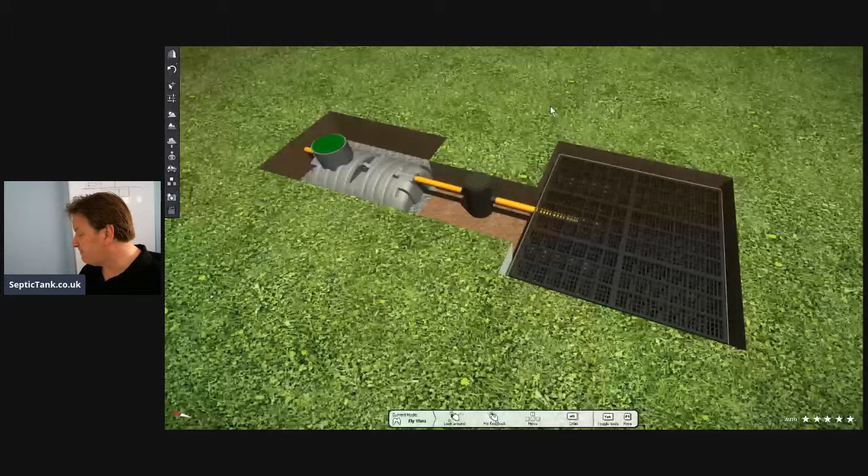If that's not your cup of tea and you don't particularly like those, the other solution we've got is the easy drain. Let me show you. Easy drain is called easy drain because it's easy to install.

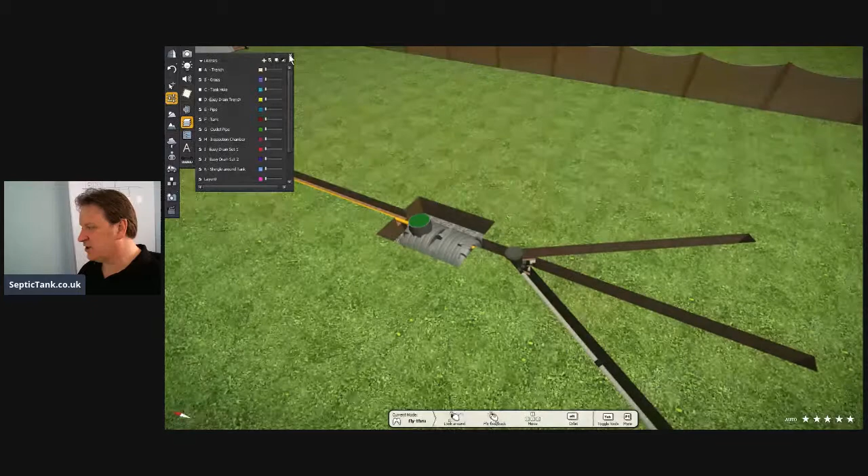So remember, we've got your trench, you've got your tank hole, and we've got the easy drain. Here's another serving suggestion. The waste pipe comes from the house, goes straight into the septic tank here, and then from there, if I take the grass away, here we go.

Again, a bullet tank. Bullet tanks are fantastic because the soakaway literally starts a foot below the grass, and this easy drain is amazing because it just feeds into the inspection chamber there. Let me just put the grass back on here. There we go, and it literally just looks like that.

3 trenches, and you've got 3 fingers of pipes that just slot in there, and it's a gravel-free soakaway pipe. So you literally just cover it back over with soil. It's as simple as that, okay? And that's another type of soakaway you can do.

So these are the modern type of soakaways that are a nod and a wink to the old traditional herringbone type soakaways, but these are newer technology. They typically last about 80 or 90 years.

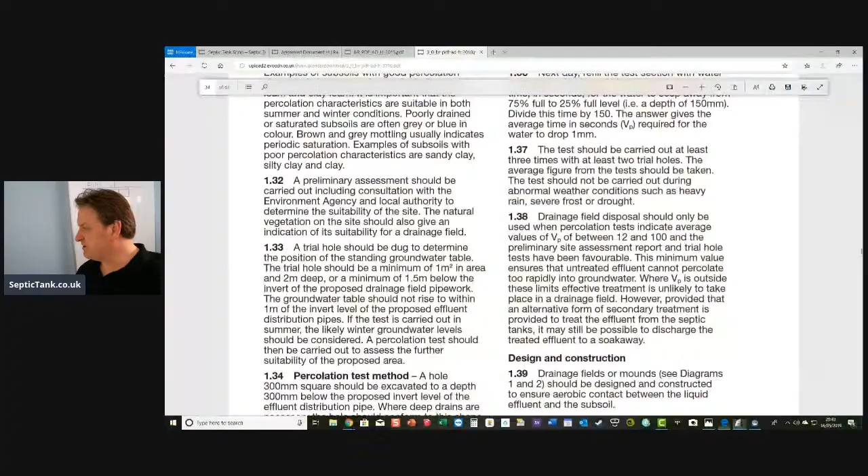But look, I've been doing this for 20 years, and I just sell some of the best products available on the UK market. The shallow dig septic tanks and these soakaway kits, there's just no problem with it. I never ever get anyone ringing me up saying the bullet tank was a load of rubbish, and that's what I like.

With the onion tanks, as I said, they're 3 times deeper. Oh, they're just a nightmare to put in. And with those old herringbone systems, you've got to dig the trench and put shingle in and pipe in and shingle and membrane. And they cost, you know, something like this is 898 quid for the same kind of system with an onion and a herringbone, you can double that and double the time it takes to put in.